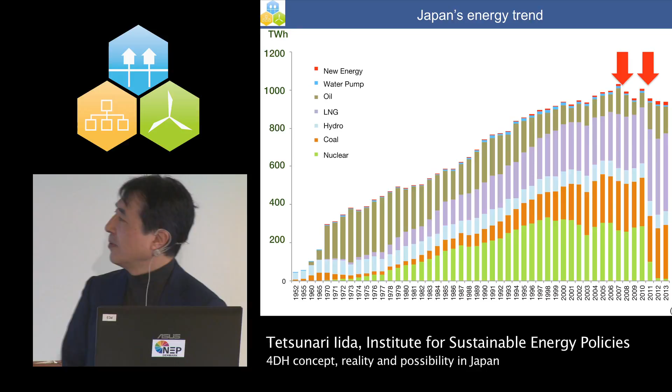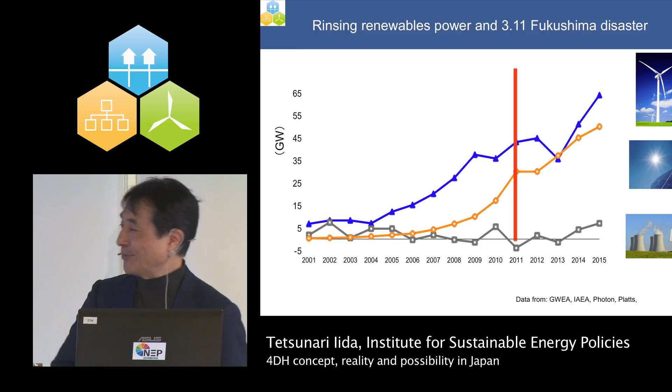So this is also interesting timing for when the Fukushima disaster happened. The last decade was the so-called explosive growth of solar and wind, a renewable revolution. The Fukushima disaster was right in the middle of that. So if we didn't have the Fukushima disaster, we would still be very much behind in renewable power, and the government would still pursue more nuclear, less renewables. And in the last 4 years, solar PV has been having explosive growth in Japan,

and we are now next to China. The annual market is the second largest next to China, and cumulatively, the number is almost the same as Germany right now. Now almost achieving 40 gigawatts in the last 4 years, because of the introduction of a feed-in tariff right after the 2011 March 11 accident. So public interest turned toward renewables, a rush to renewables.

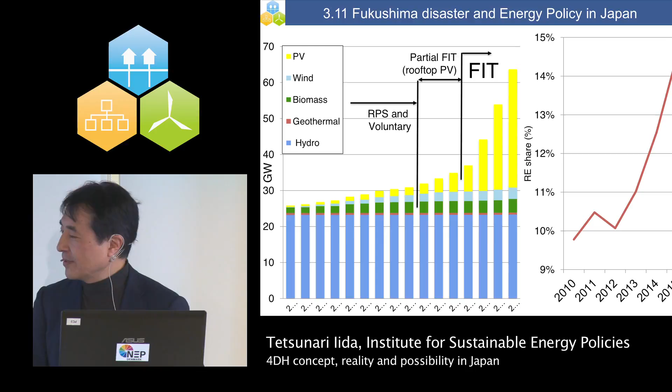And also renewable electricity has risen in the last 4 years to 15%, mostly solar PV. But wind power and biomass as renewables are now coming up. And then heat. Many Japanese misunderstand: Japan is very warm, no heat needed. But actually, Japan is relatively cold. Denmark is almost the same as the middle of Japan. Of course, we have very tropical islands, but the north part is much, much colder than Denmark.

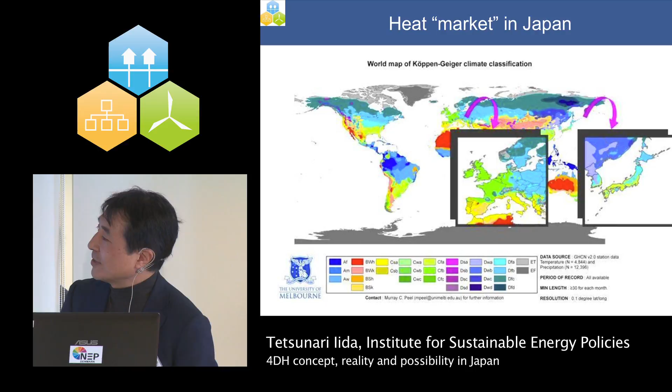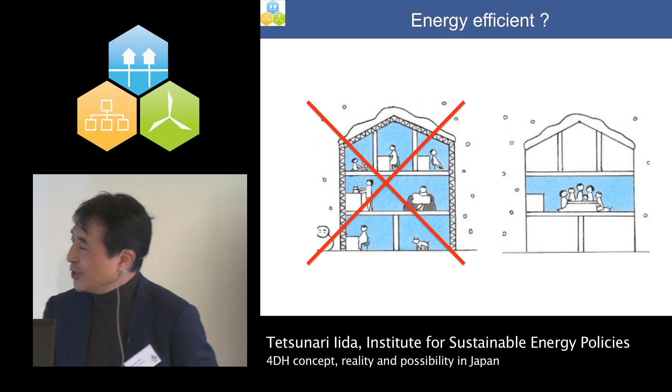This is the so-called kotatsu, a traditional warmer. So everyone wears even a down jacket in the room. That is why energy use is much smaller than other countries. Electricity is relatively larger than Germany's because of the space heat. We are a very hot bath loving country, so hot water is double that of Germany.

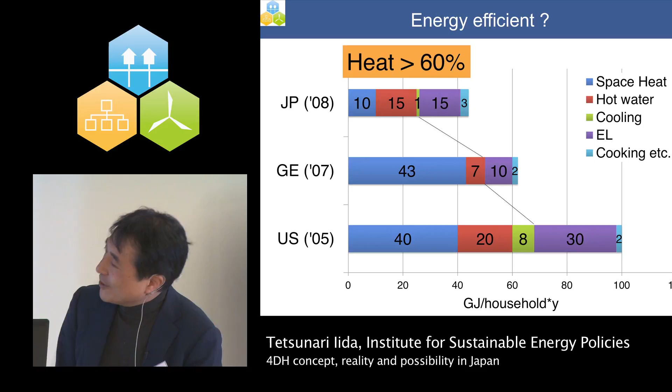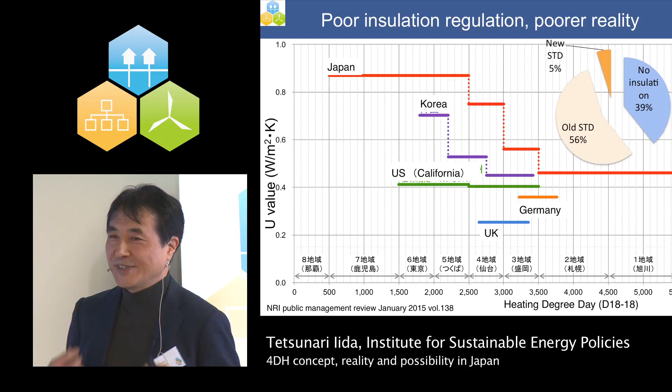The space heat is because of these structures. The insulation regulation is much poorer than other European countries, even poorer than Korea. This is the most updated, strict, but not mandatory regulation. The reality is much poorer. We have roughly 50 million houses as a stock. Houses meeting this new regulation are only 5%. The much looser regulation is 55%. Houses with no insulation, 40%. If you come to Japan, you must wear a down jacket in the house.

Also the heating devices are disastrous. We still have 25 million so-called oil stoves, kerosene stoves, in rooms. This is very contaminating for air quality. This is declining, but still very dominant, especially in local areas. So actually, between 2005 and 2010, 89 people were killed because of these kerosene stoves in the room.

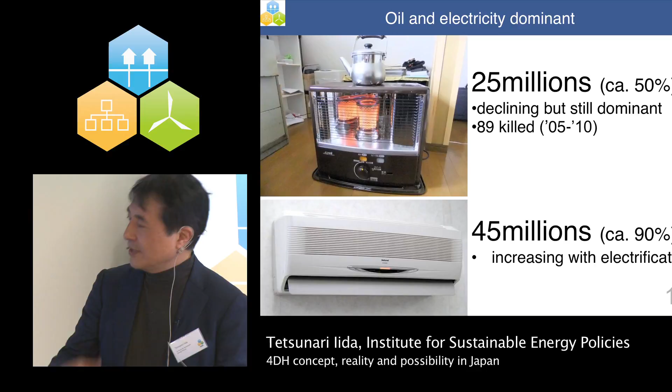And also, the dominant is 45 million, the so-called air conditioning. So this is more and more increasing with the electrification of the house. So this is a kind of structural reason for such a poor heat policy. Actually, we don't have a heat policy yet in Japan.

So our energy policy in the government is actually a policy integrating the electricity supply policy, gas supply policy, and oil supply policy. So we don't have a heat policy yet. And the policies and also the industry always take a top-down view of the market.

So especially the giant companies, the electricity company, gas company, and oil company, compete over how to get the domestic heat market. So our electricity companies try to market all-electric houses, and gas companies market so-called gas fan heaters, where gas makes warm heat in the room. And there are even gas CHP units in the room producing electricity as well. But oil is historically dominant with the kerosene stove, especially in rural areas.

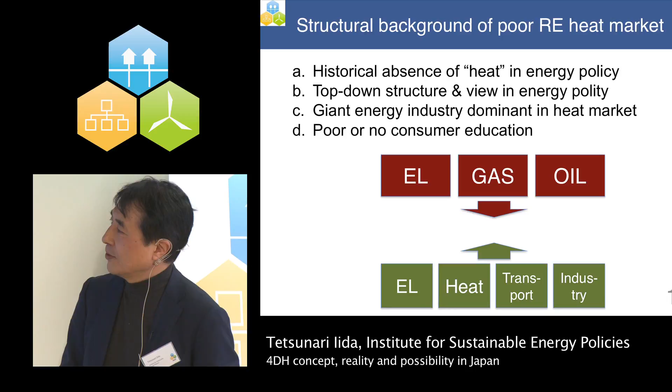So we need to reconstruct the energy policy more from the user side: electricity, heat, and transport needs. But this is another topic. And also there is very poor or no consumer education about how to use heat or how to insulate the house and those kinds of things.

So we have a lot of biomass resources all over Japan. We have 70% covered by forest, and we have a huge production of rice. Rice is the only self-sufficient food in Japan. And actually, compared to Denmark, our straw production is about 8 million tons. Denmark is something like 4 million, I guess. And you use 1.5 million tons for energy, but straw is almost not used for energy yet in Japan.

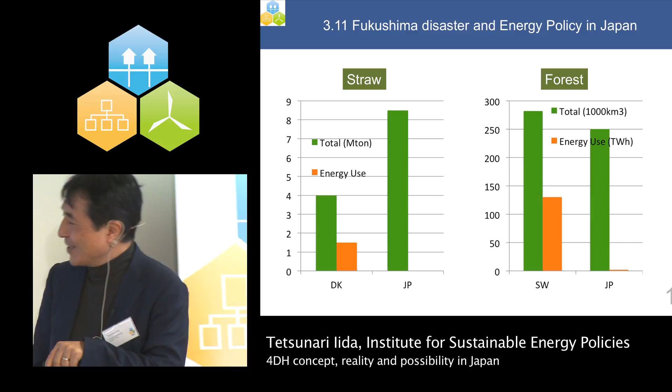And also the forest compared to Sweden. Actually, Sweden's forest area is almost comparable with Japan's. And Sweden is very famous for using forest energy for heat and CHP. But Japan has slight use now, almost no use for energy.

So district heating in Japan: historically Japan was a rather early adopter of district heating in the 1970s. The first two district heating systems were introduced in Osaka, the Kansai area, and Hokkaido, the Sapporo area. But actually since then, its position in energy policy or energy supply is very much marginal and also decreasing continuously. Less than 1% of all Japanese energy supply is by district heating.

And also the other uniqueness is that cooling demand is larger than heating. This is another uniqueness of Japan. This is because district heating is only applied to city centers and large-scale buildings. District heating is very rarely spread out in local areas like in Denmark or Sweden. It's more like inside the building, two big buildings connecting each other, and then it is named so-called district heating.

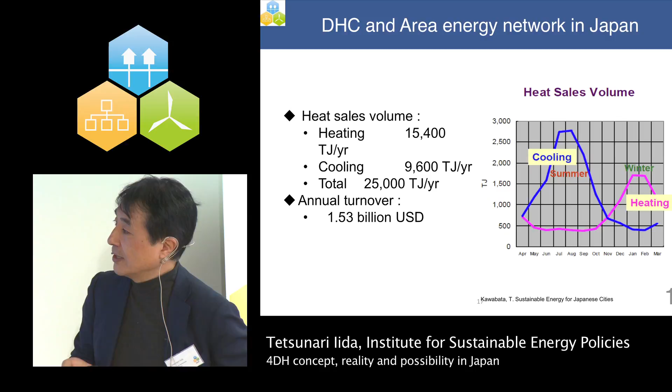And one example is Tokyo. This is one of the highest telecommunication towers in the world, the so-called Tokyo Skytree. This Tokyo Skytree has a building complex like that. It has two, or actually three, buildings connecting. So that's why this is so-called district heating, or district heating and cooling actually.

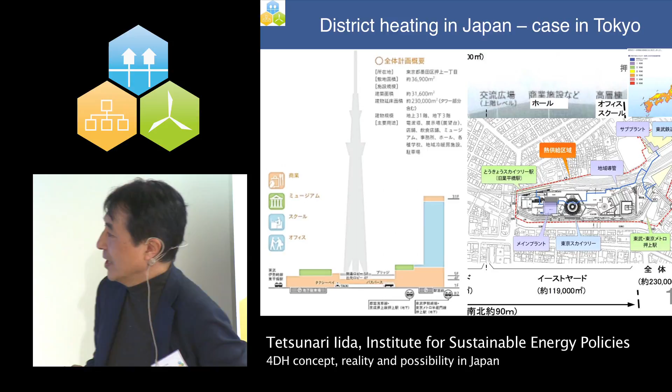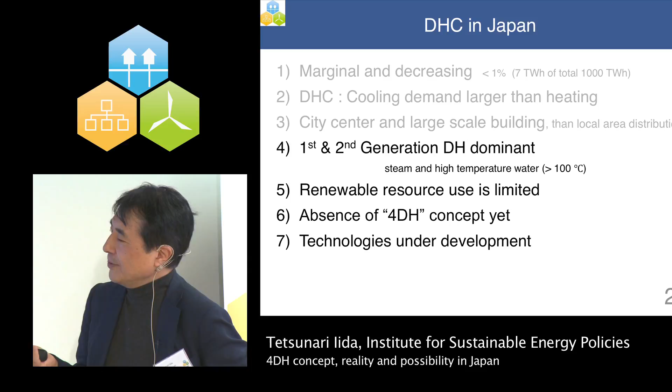And this area is covered by one district heating and cooling utility, supplying mostly cooling and some heating in the winter. So this is one example. And also in Japan the first and second generation, so-called 1GDH and 2GDH, are still very much dominant.

This is Sapporo, which Poul and Hanne visited this June. So this is summer and this is winter. Very cold climate and very snowy areas. So this part.

And this has a larger area supply network. I didn't translate each small character, but they have both steam and hot water, more than 180 degrees and 3 bar hot water supply, and very marginal 80 Celsius hot water, and also cooling. So this is a very complicated district heating area. This is part of the historical introduction in the 1970s.

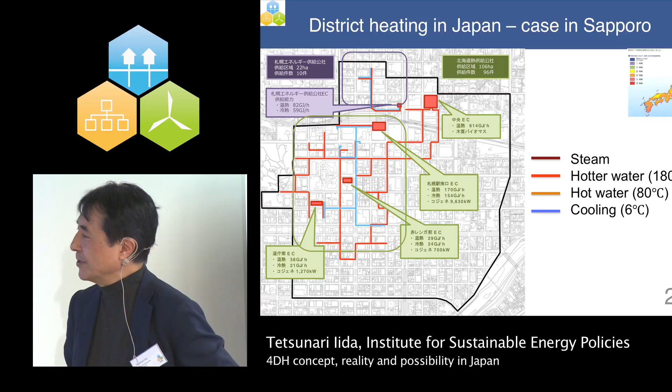So everyone used these figures. So Japan is still dominant of first and second, 1DH, 2DH, and some 3DH is now starting to be introduced. But actually, very few experts are aware of the idea or concept of 4DH. So we are part of how to spread out in academia, or to the experts, understanding of this idea in the field of district heating in Japan.

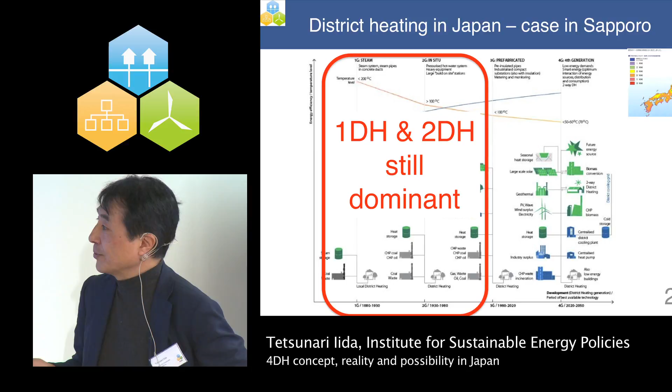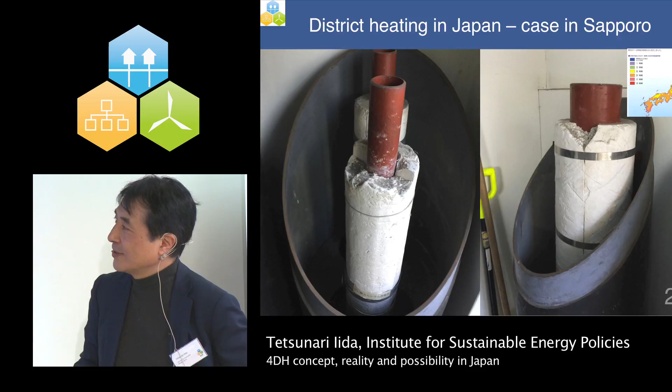And then, since the Fukushima disaster 5 years ago, local energy interests came up with so-called community power. So all over Japan there are currently 200 community powers, rising over the last 5 years. So people are very keen on producing their own energy. Starting with solar PV, now people are more interested in the use of biomass or even introducing district heat.

By the way, this is one of the Fukushima community power leaders. He is a sake brewers' leader. So the sake brewer leader is now producing renewable electricity, and he would also like to change the sake brewery heat to rice, like rice husk and also straws.

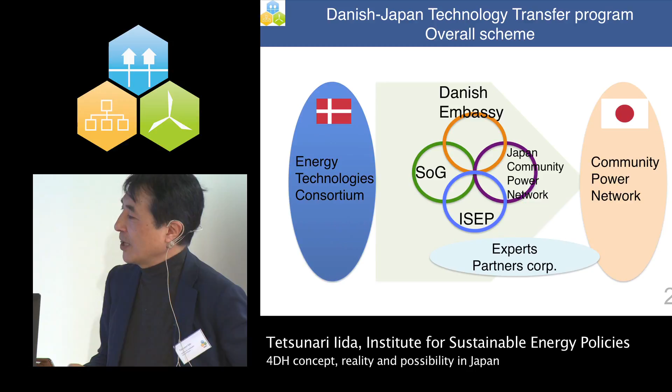So anyway, we are starting to work with the Danish so-called State of Green and also the Danish embassy in Japan, and with the Japan Community Power Network, to introduce a more distributed type of energy, and many people are now starting to come to see and learn what is going on in Denmark. And so then a pilot project jointly started with the Danish team.

One is Shimokawa, very small, about 2,000 people living, surrounded by the forest, and also Ogata village, with 3,000 people living at one place, surrounded by rice fields. So this is like a plant energy. We did a first preliminary study of Ogata village. Ogata village is very large, like an island type, very similar to Samsø Island. And at one place 3,000 people are living, and they produce huge amounts of rice husk and also straw.

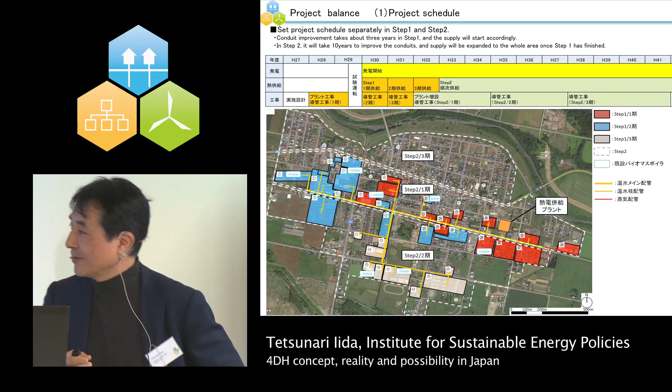And so we can start with a small scale and then spread out 100% biomass-supplied district heating into these areas. And also this is Shimokawa. This is also a very concentrated village, all surrounded by the forest. So this is also starting the design of 100% forest or wood chip CHP supplying the district heating. So this is the first start-up of a so-called 4DH project in Japan. And then I pass over the promotion side to Izumi Tanaka.

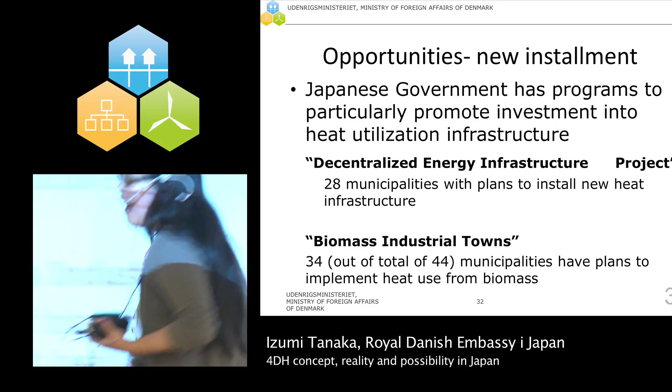As Tetsu has talked about district heating in Japan, the lack of 4DH in Japan, I would like to give a little bit brighter end of the story. We saw the same exact figure yesterday morning, where 50% of energy consumption in Europe was heat, I believe. And we heard from Tetsu earlier that it's 60% in Japan. And there was somebody smart enough in Japan to say, okay, we need to do something about that. And also the fact that we're using a lot of kerosene and electricity, which is 90% fossil fuel. So somebody said, okay, we need to do something about it.

And we were very lucky to be in touch with Shimokawa and Ogata through Tetsu's network. So, opportunities for new installations. Besides those grassroots community power networks, we also have the government that is providing initiatives.

First one is the Decentralized Energy Infrastructure Project, which is put on by the Ministry of Internal Affairs and Communications, which is funding 28 municipalities with the plan to install new heat infrastructure. And Ogata and Shimokawa, they're both part of this group of 28. And another government initiative that is helping is Biomass Industrial Towns, which there are 44 of them, but 34 of them are saying they want to use biomass for heating.

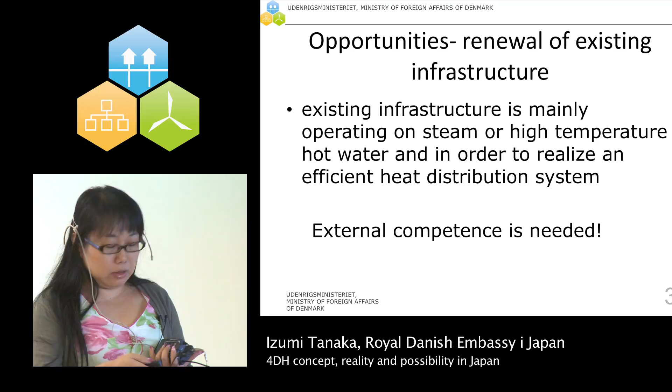So that's the brighter end of the story, that not only the grassroots activities, but the government also is supporting it. And as Tetsu mentioned about the ancient infrastructure, existing heat infrastructures in Japan, there's opportunity for the upgrade of such. And external competence is definitely needed because it's not there in Japan.

So what have we done so far? Me as a trade council, and also together with ISEP, and I must say together with Flex Energy and also Paul from Aalborg University, we've done some different things on this topic. One is a market visit by Danish companies, which we did in June 2015, which resulted in a consulting project on district heating, which was PlanEnergi. And then I have had numerous opportunities to present about 4DH, Danish district heating, at different lectures, and also we've had some booths at the trade shows.

So as Tetsu mentioned, even the experts in Japan, or so-called experts that are doing the heat planning, didn't know anything about 4DH. So we're trying to change that. We're trying to go out there and let them know such exists, and you can come to Denmark to even look at it. And also, we have had numerous Japanese delegations come to Denmark to see the actual 4DH. That included leaders from municipalities and also businesses involved in regional energy development, and also industrial associations that are already working with district heating.

And as I mentioned, we worked with Flex Energy. They came in June this year, so just a few months ago, and they have a written analysis of the market. And we, as in me at the Danish embassy, are working with ISEP to capture these different community level interests on utilizing heat.